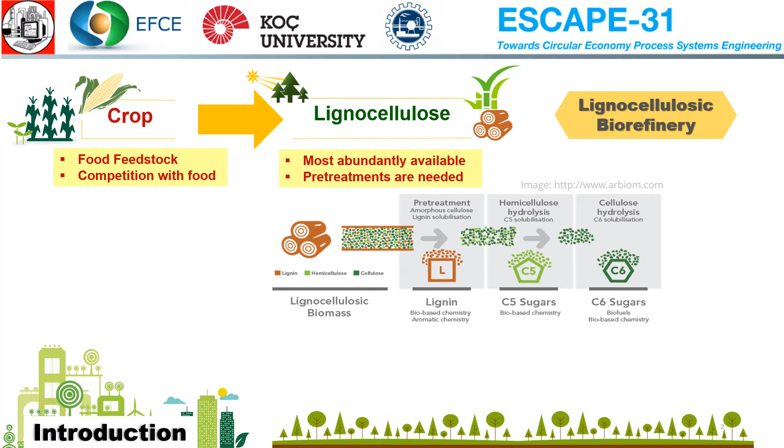Pretreatment technologies take place to fractionate the biomass into building blocks: cellulose, hemicellulose, and lignin, and they can produce a wide range of products like petrochemical processes.

The pulp and paper industry today is the world's largest woody biomass utilization system. It is a large user and producer of biomaterials and bioenergy.

Lignin and hemicellulose, which are spent chemicals called black liquor, will go to the chemical recovery unit. Here, chemicals for the pulping process are regenerated and go back for reuse in the pulping process. Organic compounds like lignin and hemicellulose are burnt to generate heat for process steam and power generation.

Petroleum is also used as fuel in the process. The pulp and paper production requires large consumption of chemicals, energy, and water, and it is characterized by low efficiency of raw material and energy consumption,

low innovation development, and high product price volatility. Moreover, printing paper consumption has been diminishing because of increased use of digital media in our hands.

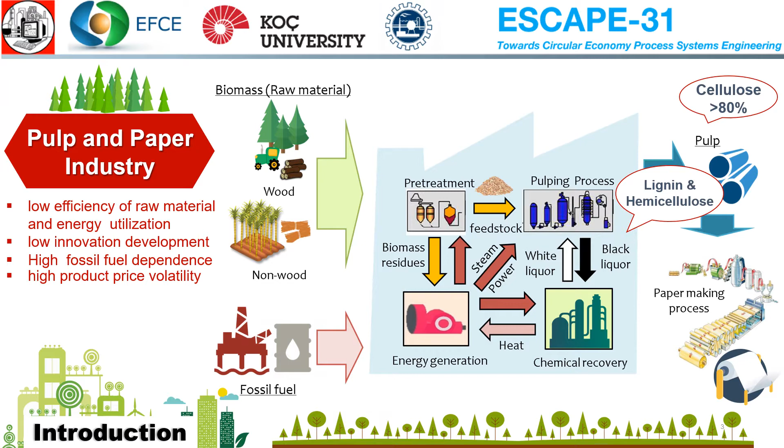The traditional pulp and paper industry needs to develop new value-added product streams to improve process efficiency and profitability, while the first generation biorefinery should move to the second generation for a sustainable future, replacing petrochemical processes. So the integrated biorefinery into the existing pulping process could be a potential pathway for long-term sustainable development of not only the pulp and paper industry but also biorefineries, with many benefits.

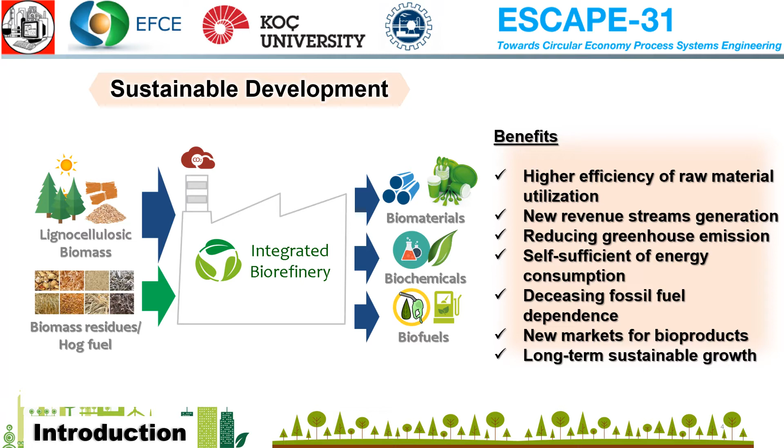The systematic methodology can be applied to develop the integrated biorefinery network. There are three stages: synthesis, design, and innovation. The first step is to do superstructure optimization to get the optimum network based on the generated superstructure.

Process data are collected to generate the superstructure that represents or considers processing rules as the network of possible alternatives. Then the optimum process goes to the design stage.

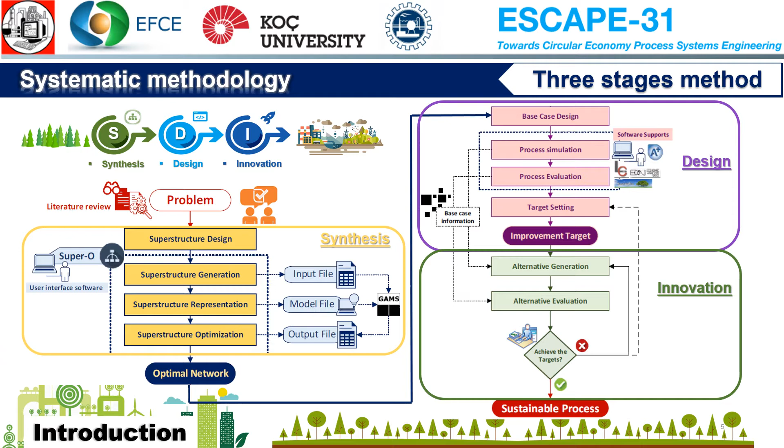Base case design and process analysis were performed based on data generated from process simulation. Then improvement targets are specified. The process will be redesigned in the innovation stage to achieve the targets, and finally get the sustainable network.

The results of process synthesis were proposed in our previous paper in the Computers and Chemical Engineering journal. The superstructure of the biorefinery integrated pulping process was generated and optimized with maximized profit as the objective function.

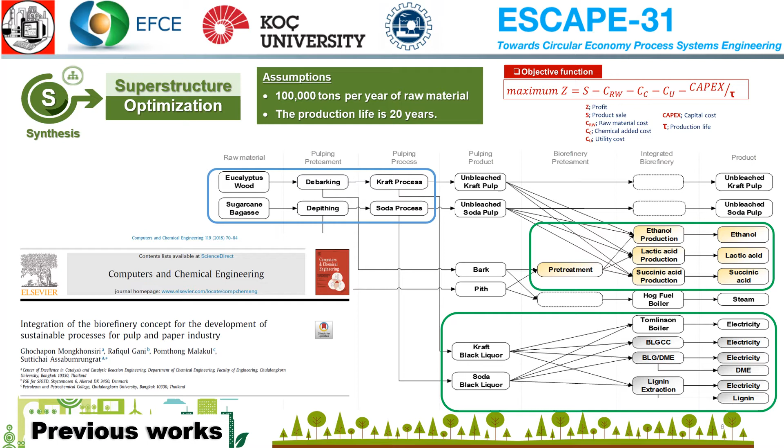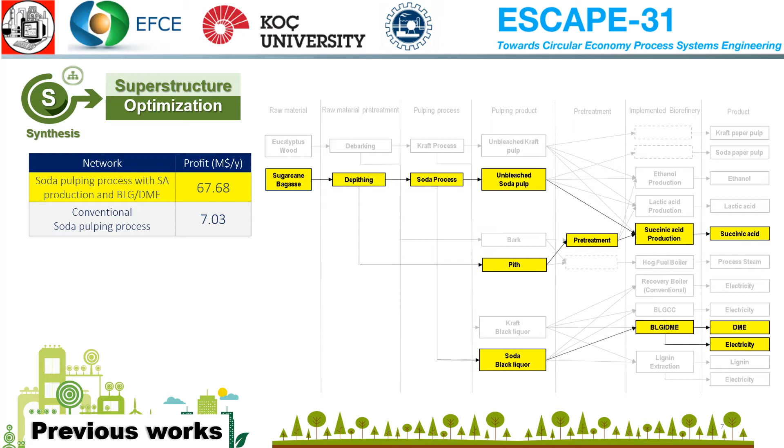From the superstructure optimization results, the optimum integrated biorefinery network is succinic acid and DME production integrated into the soda pulping process, which provides the highest profit. In the case of integrated biorefinery into kraft pulping process, it can also improve profit compared to the conventional kraft process.

In our previous work in the Journal of Cleaner Production, the biorefinery integrated soda pulping network that showed the highest profit in the synthesis stage was designed for succinic acid production by pulp fermentation and integrated with DME production by black liquor gasification.

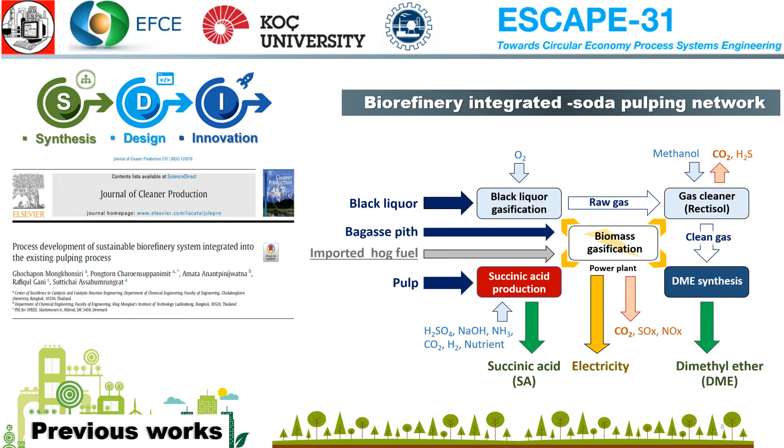Also, biomass gasification generating bioenergy for the whole network was integrated by feeding biomass waste as bagasse pith and imported biomass fuel for supplementary needs.

Further process evaluation illustrated the process hotspot: integrated succinic acid and DME production shows lower net carbon dioxide reduction compared to the scenario of only DME production, involving pulp for sale instead of succinic acid production.

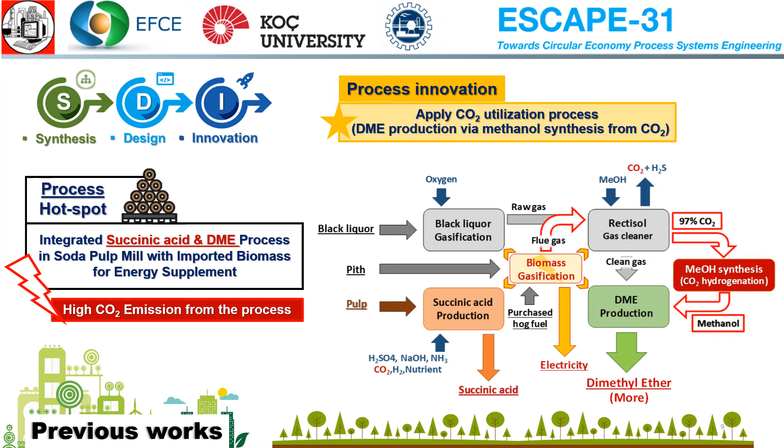Then more DME is produced from methanol via this carbon dioxide utilization process. From the results, the carbon dioxide utilization scenario can enhance the potential of carbon dioxide reduction by about 40%, with only a 1.2% profit drop due to the high operating cost of methanol synthesis.

The innovation design provides more biofuel supply but less power supply, due to more power being used in the Rectisol and DME synthesis process.

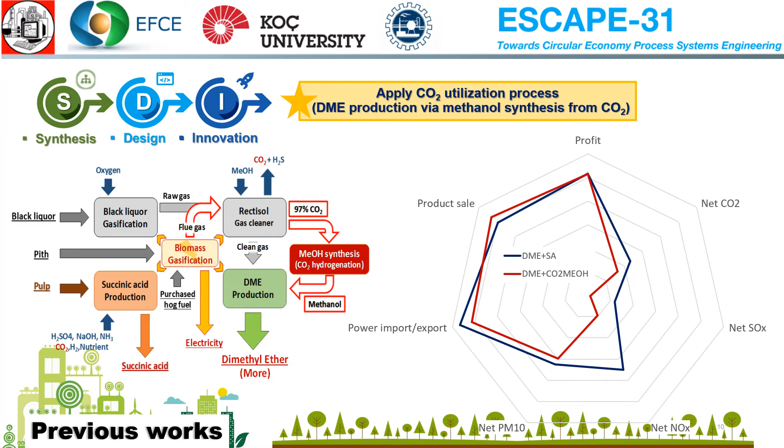To implement a biorefinery system into the kraft pulping process, we call it the Biorefinery Integrated Kraft Pulping Network, or BIK. For this work, feedstocks for the BIK network are assumed to have different composition compared to the Biorefinery Integrated Soda Pulping Network, or BIS, from the previous work.

The kraft process provides higher yield of pulp and more organic compounds in black liquor, but less biomass fuel as wood bark. The results of performance comparison between different pulping processes will be discussed in the results and discussion section.

Process performance is evaluated in terms of economics, energy consumption, and environmental impacts, based on rigorous simulations. Three different scenarios are considered, including scenario 1, which is integration of the

gasification-based DME production. Scenario 2 is integration of DME and succinic acid production. And scenario 3 is integration of innovative carbon dioxide capture and utilization.

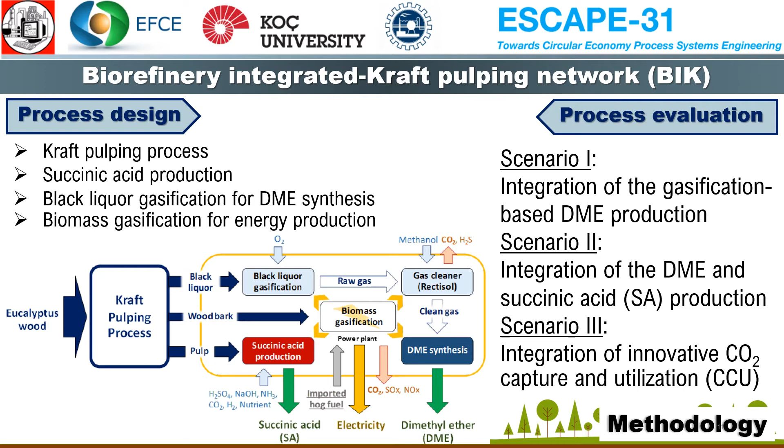The BIK consists of the existing kraft pulping process together with three biorefinery combinations: the black liquor gasification coupled with the DME synthesis and the Rectisol gas cleanup unit, the biomass gasification combined cycle for process steam and electricity generation, and the succinic acid production.

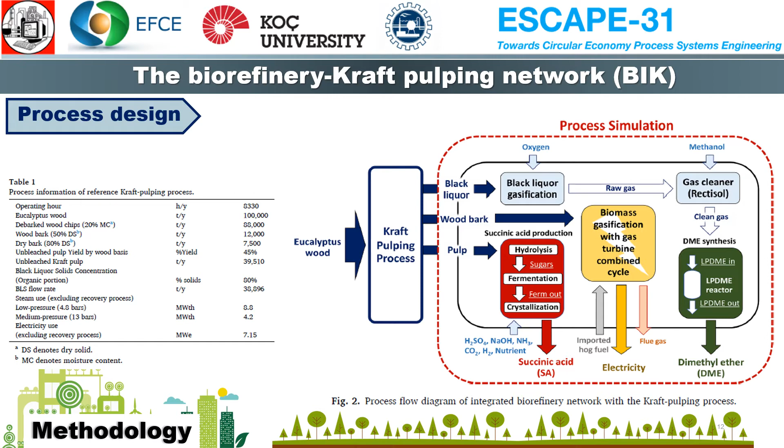After process design, process evaluation was performed in three scenarios. The process flow of each scenario is shown in this slide.

Scenario 1 considers only the integration of black liquor gasification for the production and utilization of biomass fuel in biomass gasification for energy generation. The pulp is sold for paper making.

Scenario 2 is to integrate the succinic acid production from pulp together with the integrated network of scenario 1. All pulp produced from the kraft pulping process is sent to the succinic acid process.

Scenario 3 includes the option of carbon dioxide capture and utilization because the energy consumption increases with the integration of succinic acid process in scenario 2. The carbon dioxide emission from the biomass gasification and power plant also increases.

This innovative scenario is designed to utilize carbon dioxide to produce more DME. Prior to emission, the carbon dioxide containing flue gas from the power plant is captured by the Rectisol process that already exists. The pure carbon dioxide from the Rectisol gas cleaner unit is utilized for methanol synthesis by the integration of carbon dioxide hydrogenation process. The produced methanol is sent for the DME synthesis.

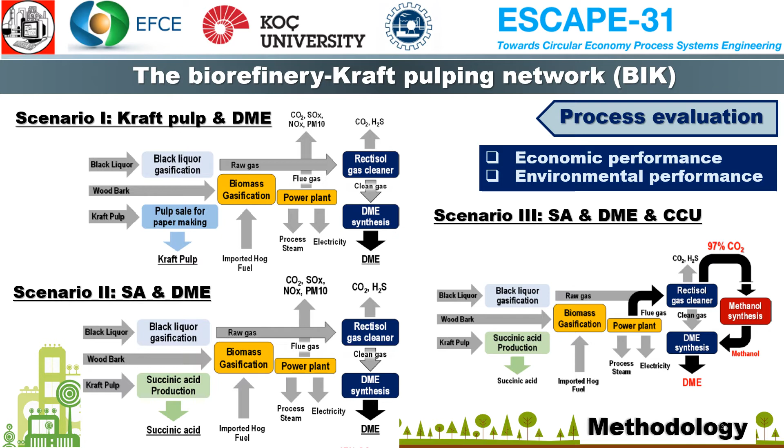The table shows the results of integrated biorefinery scenario 1, 2, and 3, comparing two cases: conventional Tomlinson boiler and black liquor gasification combined cycle, or BLGCC. The BLGCC network in scenario 1, 2, and 3 improved the profit over the conventional Tomlinson scenario by 6, 40, and 39 million US dollars, respectively.

The integration of succinic acid process in scenario 2 and 3 highly promotes profitability because of the high price of succinic acid.

Moreover, there exists power available in all integrated network scenarios, providing additional income from the sale of electricity, as well as reduction of petroleum dependence.

In scenario 3, although the extra 20,000 tons per year of DME production is acquired from carbon dioxide capture and utilization, the profit decreases around 1.1% compared to scenario 2 due to high operating costs.

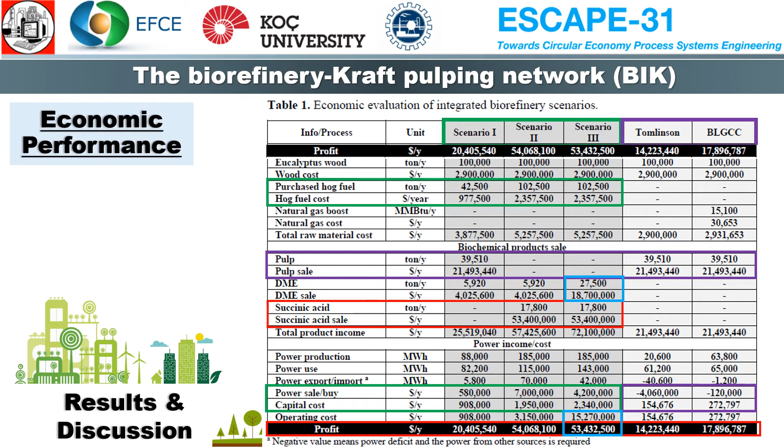This chart shows economic performance of each scenario. Succinic acid production in scenario 2 and 3 shows high performance to enhance the network profit, as shown in the green bar, while scenario 1, which produced only DME, could not provide notable profit enhancement.

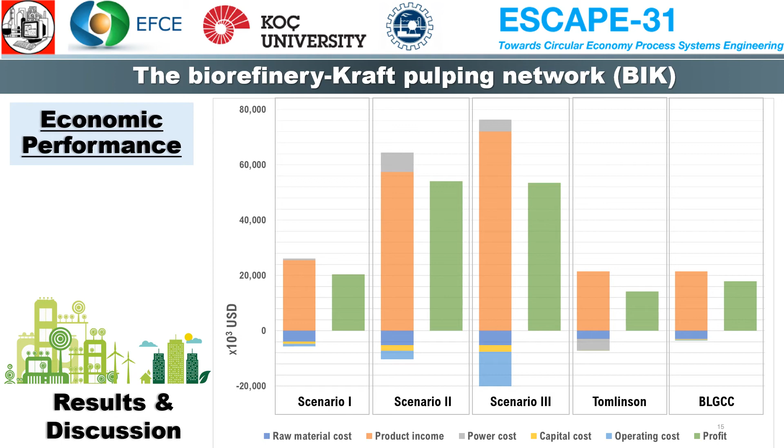Scenario 3 has high operating costs of integrated carbon dioxide utilization, leading to profit drop, in spite of more product income. As shown, the BLGCC scenario can also provide a bit of enhancement of profit by enhancing energy efficiency, which can be seen in the reduction of power costs.

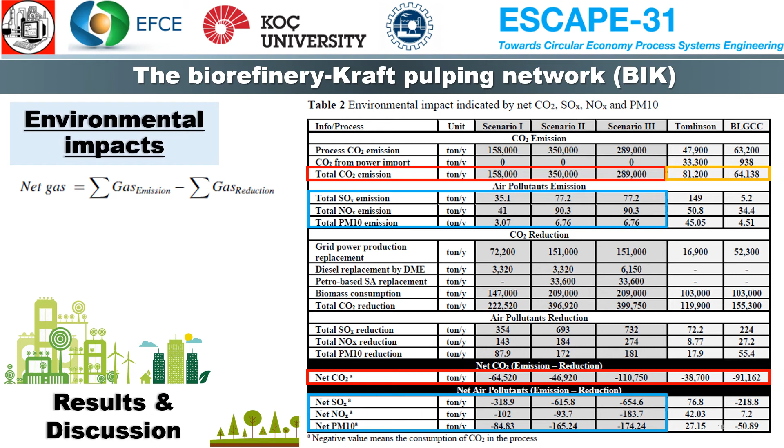Scenario 2 and 3 discharge carbon dioxide and pollutants twice as much as scenario 1 because succinic acid production demands higher energy and utilizes more biomass in biomass gasification for energy supply.

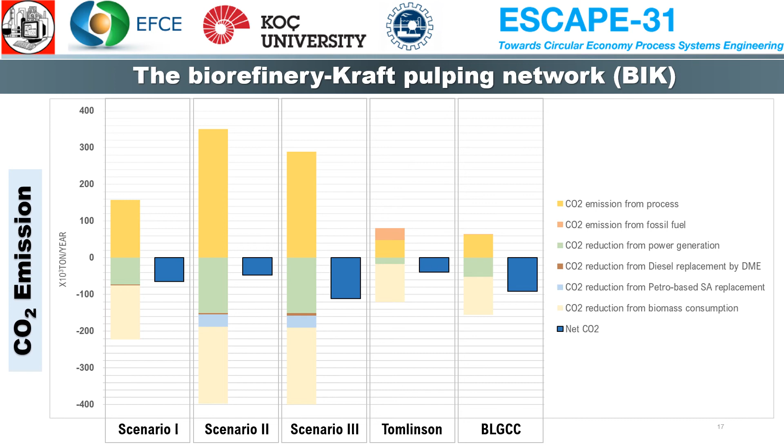All scenarios of integrated biorefinery show negative value of net pollutants. They have high potential to reduce the pollutants by implementing biorefinery activities. Scenario 3 gives the lowest value of net pollutants, whereas conventional combustion boilers show positive value for all net pollutants because of fossil fuel consumption.

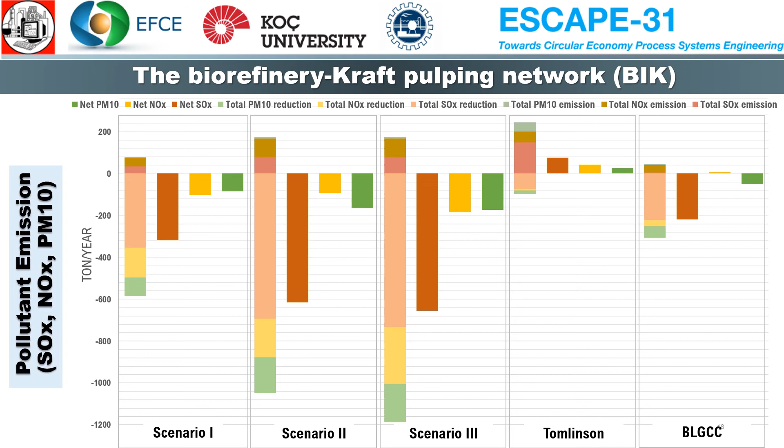The results show performance comparison between Kraft process and soda process implementing the same biorefinery system. To meet the steam requirement through the biomass gasification combined cycle unit, the Kraft process (BIK) requires more supplementary biomass than BIS because the availability of leftover biomass residues from the Kraft process is less.

The Kraft process in scenario 2 and 3 can produce more succinic acid due to higher pulp yield. A reduction of 30% in net carbon dioxide is observed in scenario 2 and 4% in scenario 3, comparing to soda process.

In scenario 3, the higher sulfur content in the syngas is due to sodium sulfide used as Kraft pulping chemical. This causes a lower flow rate of the pure carbon dioxide stream for methanol synthesis, so less DME is shown in scenario 3 despite more carbon dioxide emission.

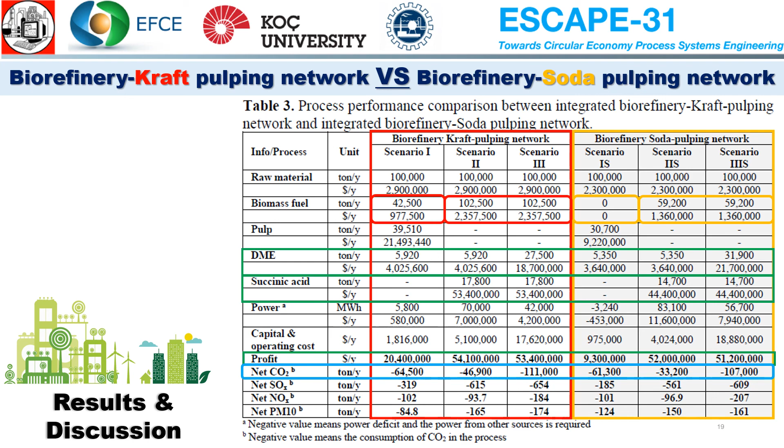For case 1, scenario 1 gives higher profit compared to scenario 1S, due to the more expensive price of Kraft pulp.

In contrast, scenario 2 appears similar. Only 4% higher profit is obtained with scenario 2, although the amount of succinic acid is more in scenario 2.

The higher demand of energy in the carb pulping process increases the operating costs and reduces power income.

More succinic acid production and more biomass gasification operation in scenario 3 leads to higher profit and lower net carbon dioxide than scenario 3S, despite lower DME production.

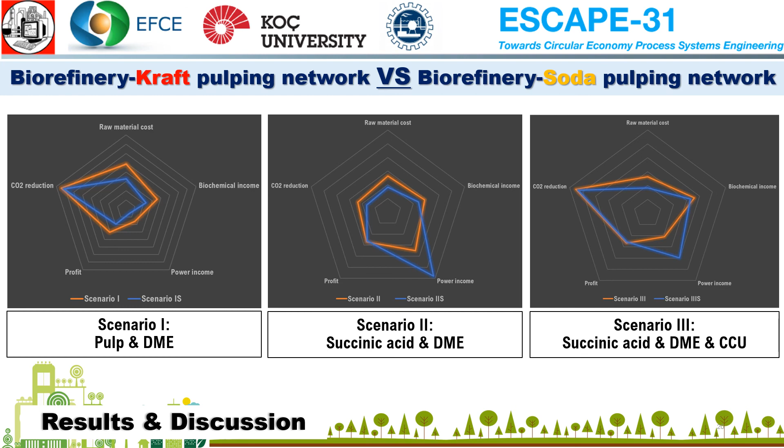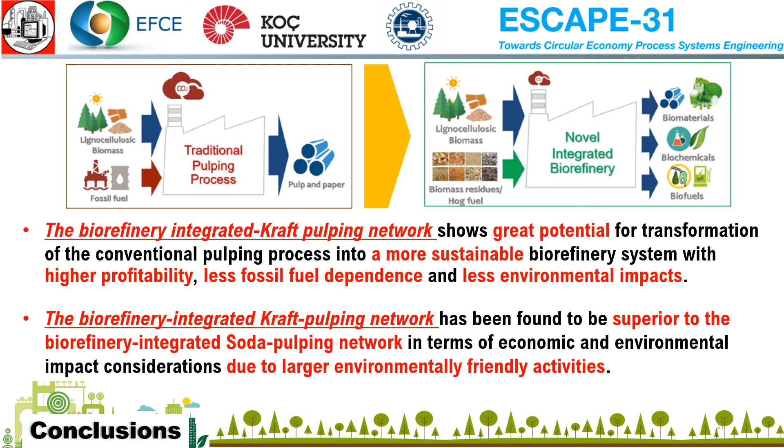For the conclusions, the biorefinery integrated Kraft pulping network shows great potential for transformation of the conventional pulping process into a more sustainable one, and it shows better performance than the biorefinery integrated soda pulping network due to more environmentally friendly activities. Thank you for your attention and all support.